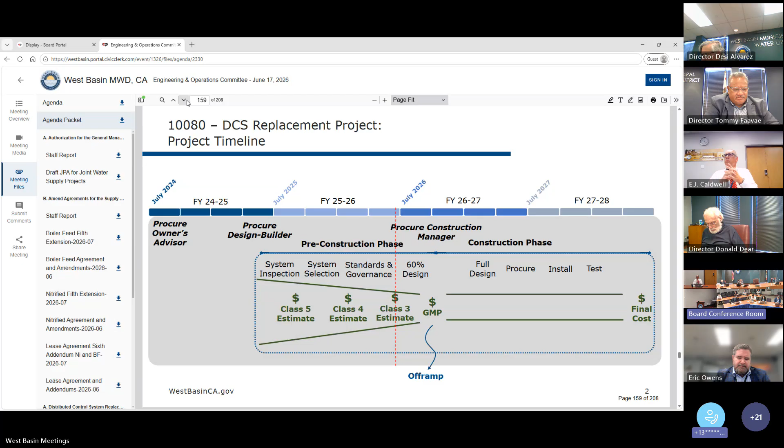We're now forecasting remaining fully within budget through to the GMP, and we don't anticipate spending any of the contingency. Next slide, please.

This slide shows how the construction cost estimates have changed as we proceeded through design. The black line shows the actual estimates, while the dotted lines show both the upper and lower ranges as defined in the standards developed by the Association for the Advancement of Cost Engineering, AACE. As you can see, the range narrows as the design is developed and decisions are made.

It begins at minus 50% plus 100% of the estimate at Class 5, and has now narrowed to minus 20 to plus 30% for the current Class 3 estimate. By the time we get to the GMP, the estimate range will be minus 15 to plus 20% either side of that black line, a range that will be incorporated into the GMP as contingency.

You can see here the black line, the primary estimate, has trended upwards slightly over the last year. The roughly $350,000 increase from Class 5 to Class 4 estimate was mostly due to the addition of 5 years of full system support that we baked into the cost estimate.

This additional support and subscription costs actually added approximately $1.5 million to the estimate, but the system we selected at that point was less expensive than we initially anticipated, and that reduced the estimate by around $1.2 million, leading to a net increase in the cost estimate of around $300,000.

Between the Class 4 and Class 3 estimate, we added some optional allowances to the cost. These are optional add-ons to the construction phase the district may wish to include later. For example, there's approximately $350,000 in there for preparing the Torrance site for a potential cutover to refinery ownership.

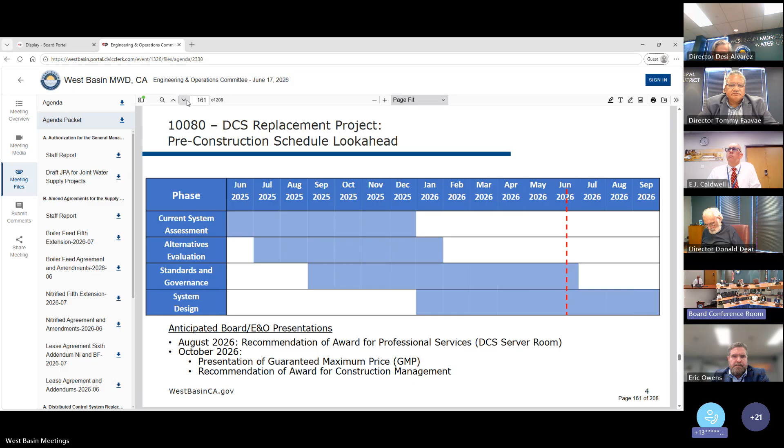Therefore, we'll be bringing this award back to the board in the next couple of months. The anticipated contract cost for this is going to be less than $150,000, and it is included in the FY27 budget. Next slide, please.

And so finally, on to the next steps. Next steps will be to procure that design consultant for the server room, to continue developing the design for this new DCS system, and then to finalize the dozens of new standards and governance documents that we're currently developing for the new system. The aim is to have all of this wrapped up in September for incorporation into the GMP, which we'll present in October.

And with that, I'll conclude my presentation. Open up to any questions.

Thank you. Director Faavae, any questions? No questions, but I have a comment. Thank you for your presentation. It's always good to see the next steps moving forward, and look forward to bringing back to the board on pre-construction and so forth. So thank you.

Director Jim? Nothing. Director Dear? No, thank you.

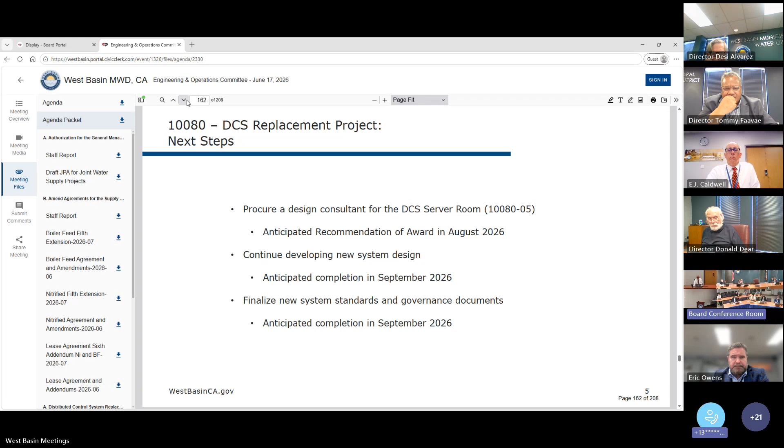On the presentation, can we go back to slide 3? Yeah, the cost estimate. Yeah, that is 160.

John, you mentioned that there's, as we're going through the process, you've added a couple of components to the project that were previously not there. Correct, yeah. And you briefly described them. But there's not much of a description in the staff report, so I was wondering if we could maybe provide us with a written description of what those are.

Just for clarity, would you like a description of the large items? We made a lot of decisions in the last year or so. Well, just the biggest impact, specifically of all the new items that you've added that were not part of the initial project. Okay, understood. And you referenced quite a few, so it'd be nice to have a better understanding of those.

And then on that graph that you have on that slide, that's a class 3 estimate at this point. Correct, yes. So that's plus or minus, I don't know, 30%. It's minus 15 plus 20, sorry, minus 20 plus 30 at this point.

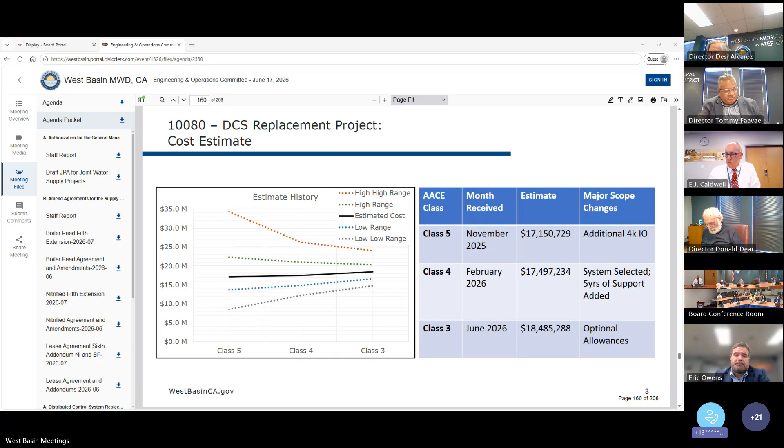Okay, any other questions or comments? Nope.

All right, so we will move on to the second item on our information calendar, which is the engineering operations update for water production and asset management. Yes, Mr. Chairman, this item will be presented by both Susanna Lee, our Manager of Engineering, as well as Mario Batista, our Engineering Supervisor. The item begins on packet page 164.

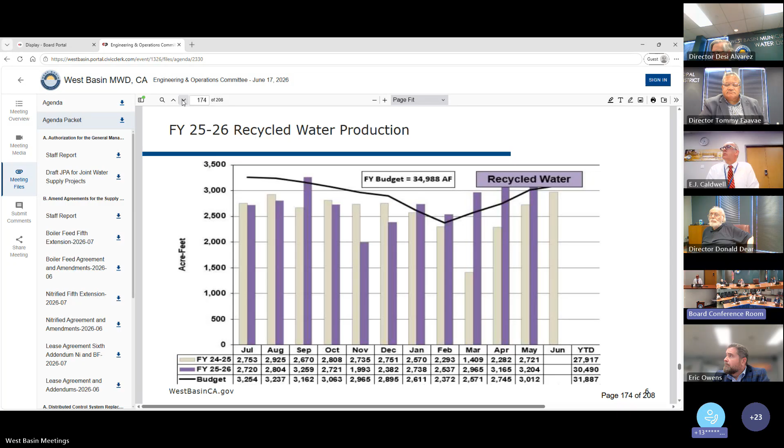Okay, production. This graph you might be familiar with from the finance committee. The main point is that we continue on this upward trend, meeting the monthly estimates and budget, and we're projecting to hit 95% of our FY 25-26 budget sales. Credit goes to our production teams for bringing back equipment that was out of operation the last few years, working with Jacob's team to improve reliability, and working closely with our Hyperion counterpart at the county to anticipate upcoming shutdowns and continue pushing for barrier production. It's been a great year.

Next slide is a different view of production. The green bar shows the FY 25-26 budget for each product line, the shaded bar is last year's production through May, year-to-date, and the deep purple is this current fiscal year. The main takeaway is that Title 22 is trending a bit down compared to budget, and barrier is the other major deviation from budget, but everything else is doing really well compared to budget.

I do have a question. In general, production this year versus budget is pretty much on target, with the exception of the barrier. Is that because of issues on our end, issues on the county's end, or a combination of both?

Combination of both, mostly on the county. In July, we were still waiting on certain parts, there was a leak, and we had to extend into August before we could bring production back up. That took out most of July. At the same time, the county had some unexpected leak on their end as well, which extended the shutdown of the production period in the early part of the fiscal year. Could you jump to the graph that's familiar?

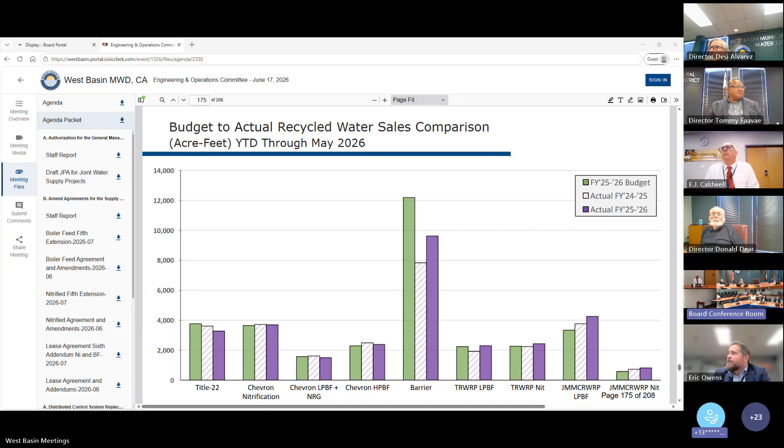We've been working closely with the county to maximize recycled water injection. Now we have a monthly three-way coordination meeting with WRD, the county, and West Basin, so we're working closely to hit our objective. They're aware of our annual target, as well as what the county is able to allow us to inject to the barrier.

I was just going to add that Susanna is probably being diplomatic, very nice, about our partners at the county.

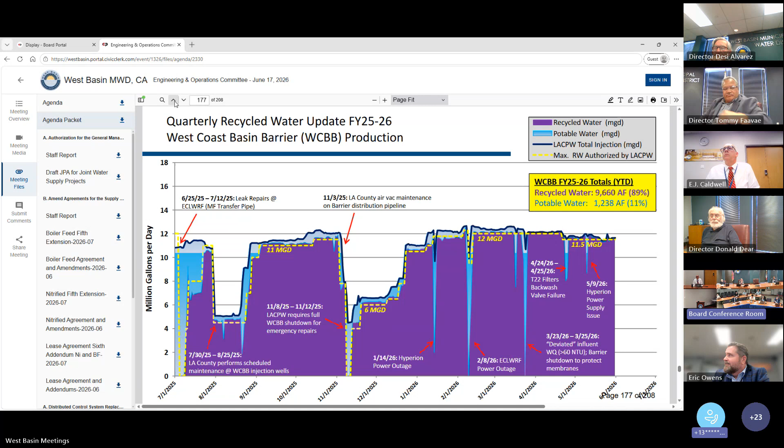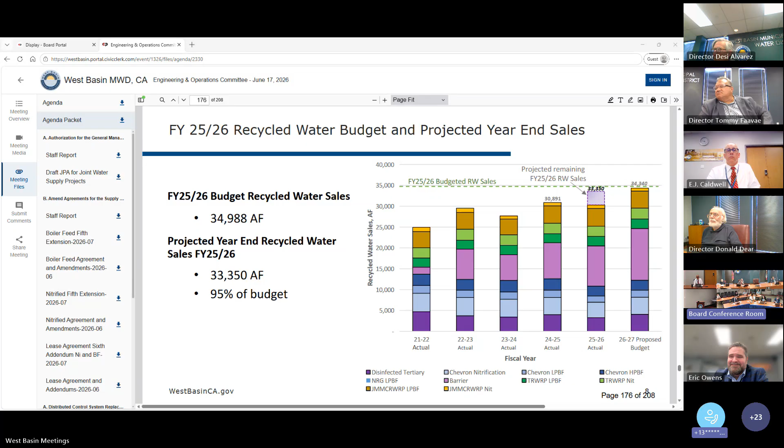Thank you. To enable all these productions, obviously we need membranes, so we want to bring some attention to membrane activities going on over the last few months. Just want to highlight that we continue to try to optimize our operations - this is one good story we want to bring to light.

We worked with a third-party recycler, coordinating with Jacobs on the previous two rounds of membrane replacement, including the most recent one. This third-party recycler provides crates that help the maintenance staff organize these used membranes and ship them back to the recycler free of charge, so we don't have to pay disposal costs. The maintenance staff really appreciate this effort because it helped them organize and made the replacement a lot more efficient - it used to take at least 3 days to replace a train, and it's now shortened down to 1 day, because it's just a lot more efficient this way, and it's free.

So these membranes are being reused - this is a good story to let the board know. And with that, we also want to let the board know of a couple upcoming activities, because like I said, to have these productions, we really need to have membranes.

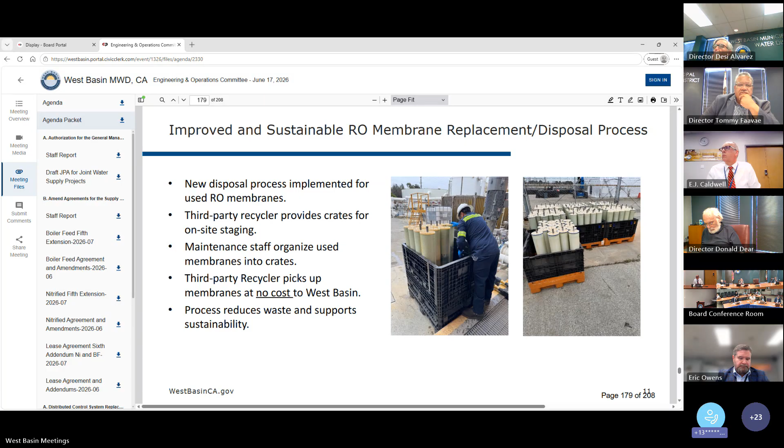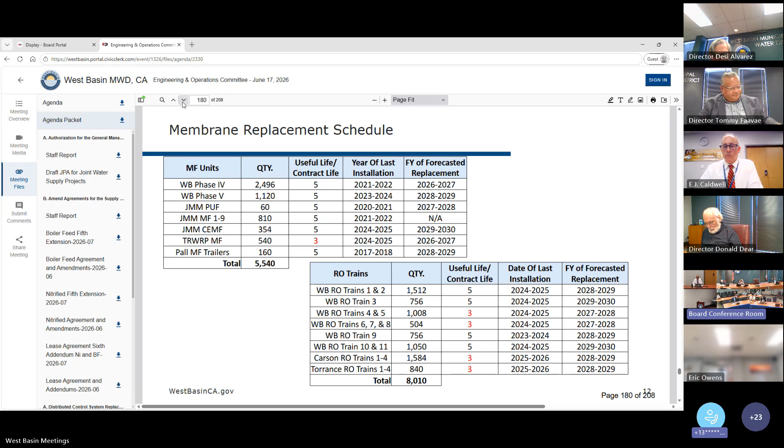That last column shows the fiscal year of forecasted replacements. The punchline is that within the next 3 fiscal years, the vast majority of these membranes are going to be slated for replacement, with just a few exceptions. Obviously those replacements will be based on actual performance—this is just how we're forecasting—but we want to be prepared for that eventuality, which is why we've already started a membrane pre-qualification process.

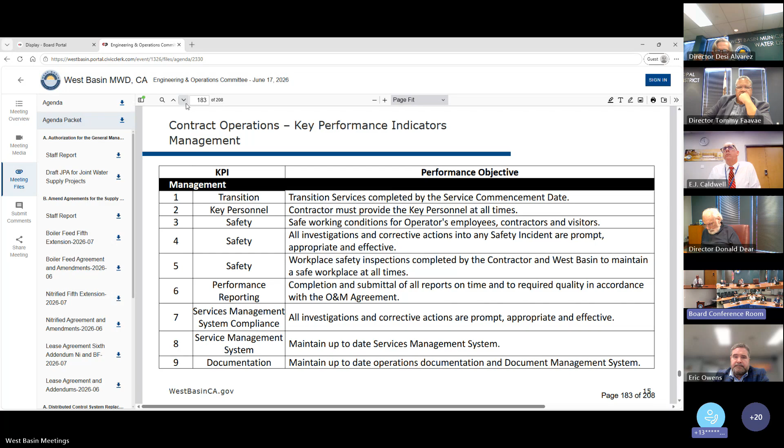This next section is, as Susanna alluded to, O&M contract KPIs. A critical part of our agreement with our contract operator, Jacobs, is these new key performance indicators. There's a total of 19 they're beholden to, and each has an associated incentive or penalty that we assess at the end of each contract year. Many of these are tracked on an ongoing basis, but as we approach the end of our first contract year, we're taking a very close look at the status of all of these.

What we've had Jacobs do as part of their requirement is report out to us, and develop a structure to report out to us, the status of each of these KPIs through a dashboard, which we'll show the early iterations.

I'm not going to go through all of our KPIs, but just a broad overview. This first 9 are management - that's personnel, safety, and then reporting requirements, both performance, compliance, and maintenance, as well as document management systems.

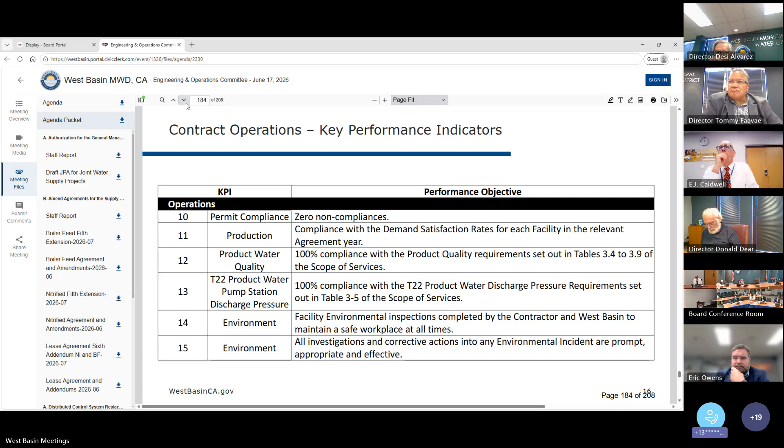The next slide. Can you go to the next slide, please?

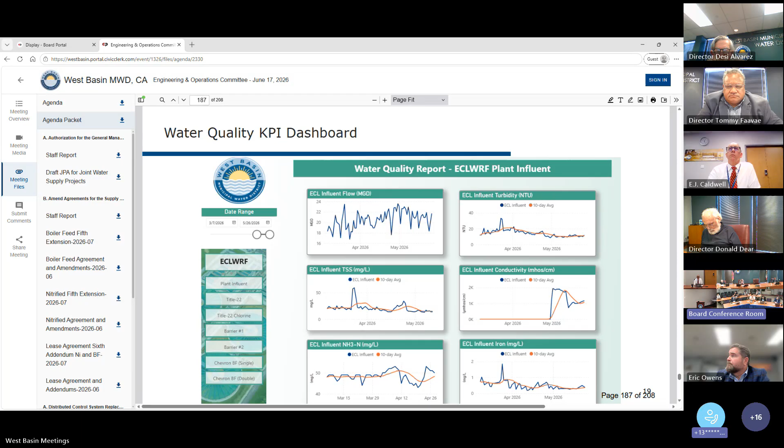With that, if you can go to the next section, asset management. I'm maybe a stand-in for Jeremiah on this one—he's our subject matter expert, definitely.

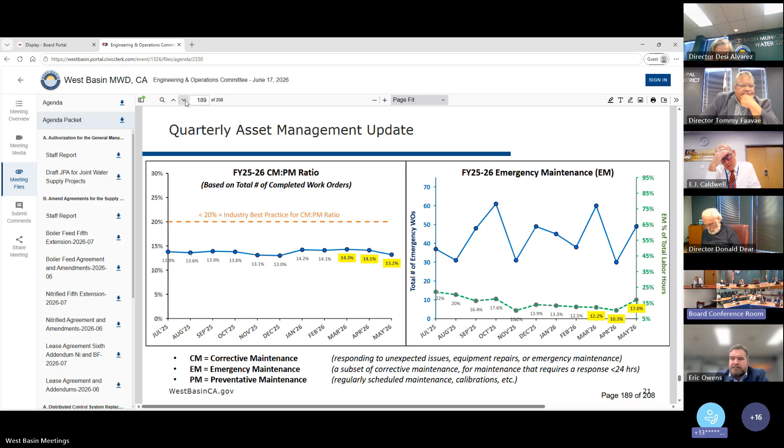That's a little more evident on the next slide. You can see here where we've made our major improvements, increasing the relative amount of time spent on preventative maintenance, getting into the proactive mode versus the more reactive mode with corrective maintenance. So it's a positive trend this month.

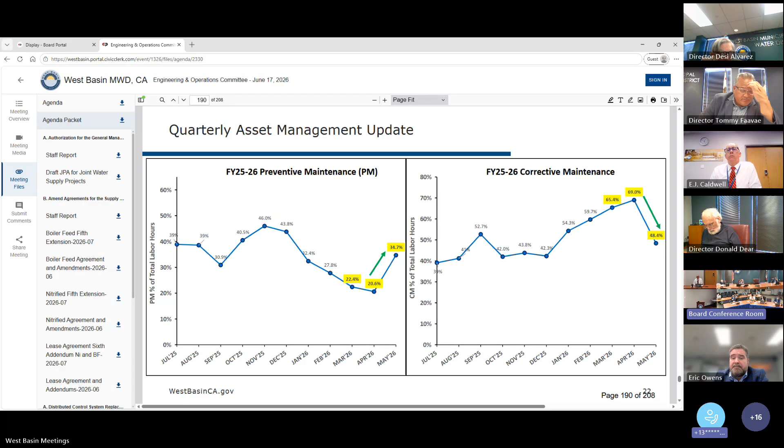And then finally, just wanted to show the live asset management KPI dashboard.

We're still working on this and how best to visualize it. Right now, this tool is more geared towards project manager use, so we're working on getting a summary sheet that's more applicable for the board and executives. But this is just a preview of what's been going on.

This has been something that Jeremiah spent a lot of time working on with the Jacobs team, so he deserves a lot of credit for it. I'll say this dashboard is further along than the others.

In parallel with that KPI work, the Jacobs Asset Management Team has also been working with West Basin staff on some condition assessment efforts.

This has been ongoing since the beginning of the Jacobs agreement, and we really finished the first round—an assessment of all the assets at all our facilities—literally just at the beginning of this month. This slide is an overview of that effort.

This consisted of an asset management team alongside West Basin staff physically going through every facility, photographing and documenting the condition of every single asset, recording that information, and going through a very detailed checklist bespoke to the type of asset. A very labor-intensive activity.

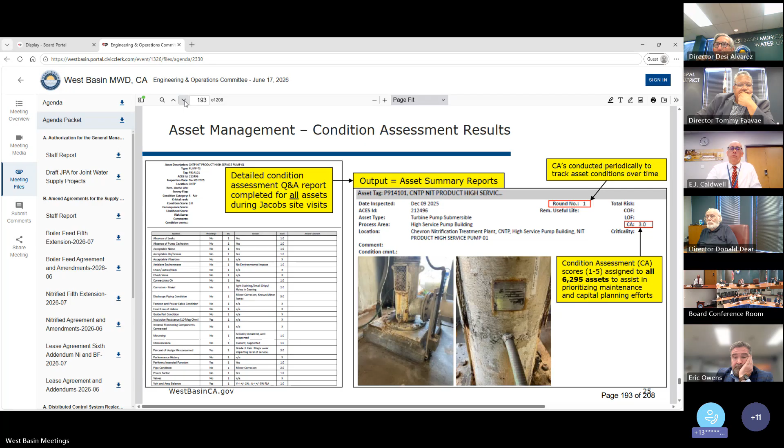So another activity happening in parallel is the predictive maintenance development. This is a program specific to several of our high service pumps. We're trying to get ahead of any maintenance requirements by doing additional investigation, including motor circuit analysis or vibration analysis, that can help us better understand what type of maintenance activities may be needed.

So this example is showing a Chevron nitrified high service pump 1. You're seeing on the right-hand side, a vibration analysis shows there's potentially some bearing wear being indicated. So something we need to be aware of and be prepared to do some maintenance on.

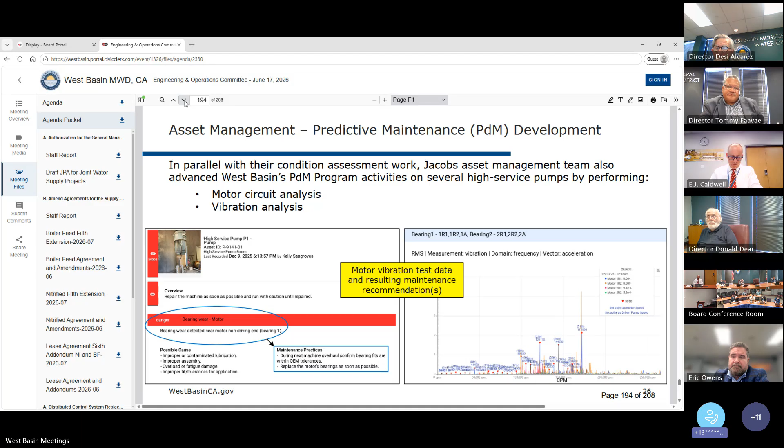Then let's go to the next slide. So another example of this predictive maintenance, now with the motor circuit analysis, in addition to having maintenance recommendations like the bearing wear you just saw, the reports can also show the potentially annual energy usage or loss associated with some of these defects or warnings. So it shows annual energy usage as a prediction, then makes some assumptions to develop a potential energy cost of what we're incurring by not performing this maintenance activity.

So then we can make a decision against what the cost of the proposed maintenance activity is, understand what that ROI is, and understand how long we can or should wait until we effect those required maintenance activities. Next slide.

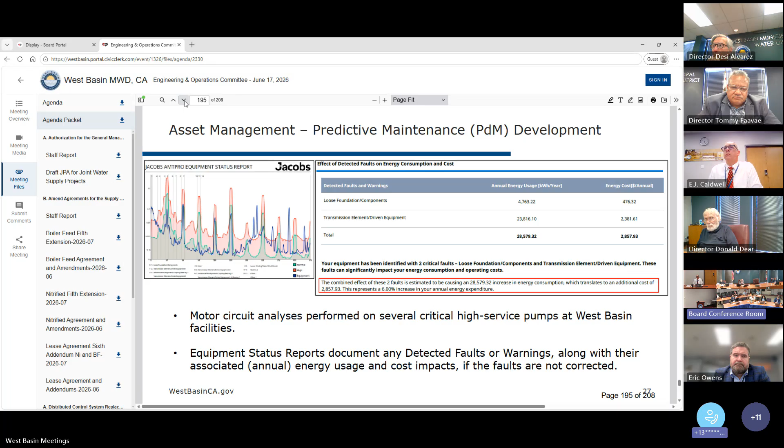And this is something we kind of already talked about, which is what are the next steps. We have the condition, and to get the overall criticality, the other components we're going to look at are both the consequence of failure, Susanna mentioned, and the likelihood of failure for each asset. Those scores combine to give us an overall criticality rating.

This is important not only for our asset management program, but within the contract we have a requirement for different types of monitoring based on whether an asset is determined to be criticality A or B categories that are tied to the contract. So this is going to be a collaborative effort because we have to come to a mutual agreement on which assets meet those definitions.

Those are really the next steps. That's what we're working on moving forward. That's the end of that section. The next is just going over maintenance activities. So I'll be happy to answer any questions you may have.

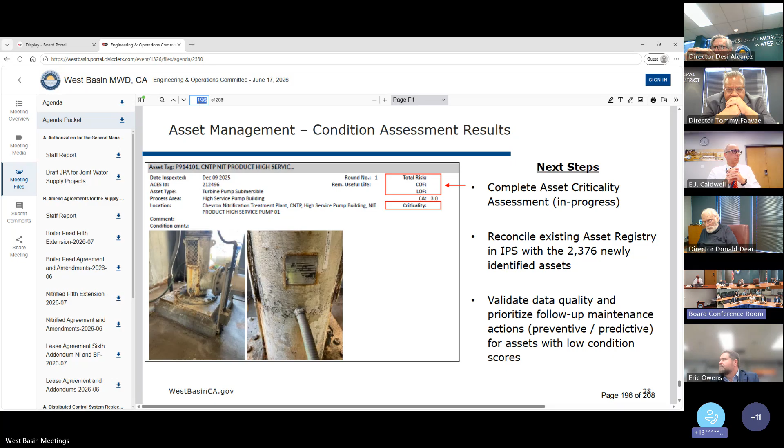So at the very beginning of your presentation, you had the dashboard up, and that asset management software, I think, was being populated. Is this the asset management software that we purchased that was going to be integrated into Jacobs? Or is this Jacobs' asset management software? So this, and where are they actually - the two?

So this is actually just Microsoft Power BI as the output. It is pulling the data from Infor IPS, which is the software we purchased, that we own. So it's directly an output of that. This is just a way to visualize it in the way that that software can. So this is our software.

That's correct. Now, when we purchased that software, if I recall, the question is, we purchased it in anticipation that they were going to use it and we've provided it. Correct. Yes. We identified in the contract that West Basin provides the CMMS software. Making sure they use it.

Yes. My question was, why are we buying this? Shouldn't they be providing that software? Just wanted clarification that this is what we purchased.

I can offer, Director, that in the various proposals received for the contract O&M services, everybody had their own flavors or preferences for different products. One of the things we were adamant about specifying is that we had already made a significant investment, even in our staff time, with this Infor system. So we left it open that if somebody did have a better way to manage these services, we would hear it. But for the most part, everybody was encouraged to speak to how well or how effective they would be in using Infor specifically. Thank you, that was my question.

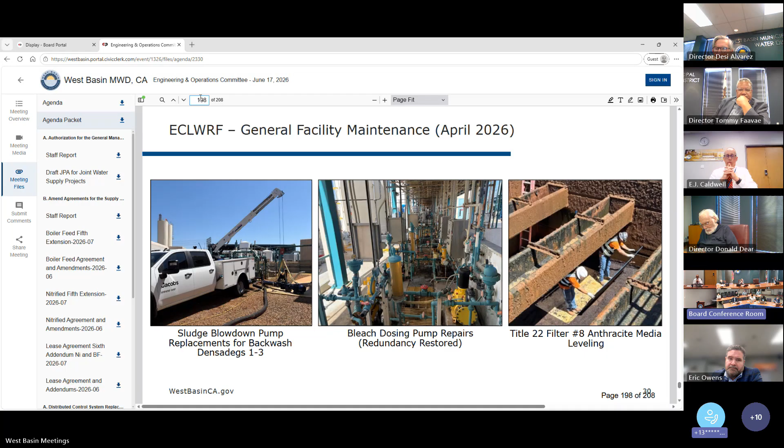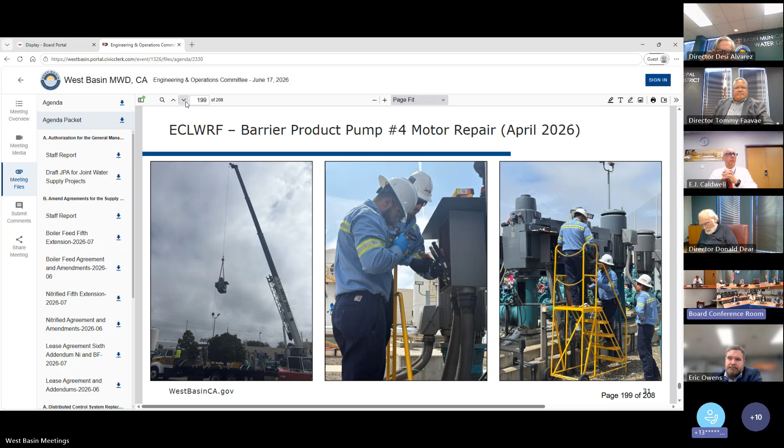This is one of a couple of major pump repair activities that took place this past month - the barrier product pump #4 motor repair. This was actually returned in April, and there was some effort that went into May with the I&C team to reconnect the pump and motor and get that equipment back into service to support barrier production.

The backwash pipeline video inspection - we have a backwash line for our converted filters that's had some leaks, so they sent a rover with a camera on it down the 20-inch pipeline to try to identify some of the areas that are likely for leaks. We were able to narrow it down, and we actually just recently this week charged that line in the section that was identified, and there's a number of leaks. So we'll show photos in the future of what that actual repair looks like, which could potentially turn into a bigger project.

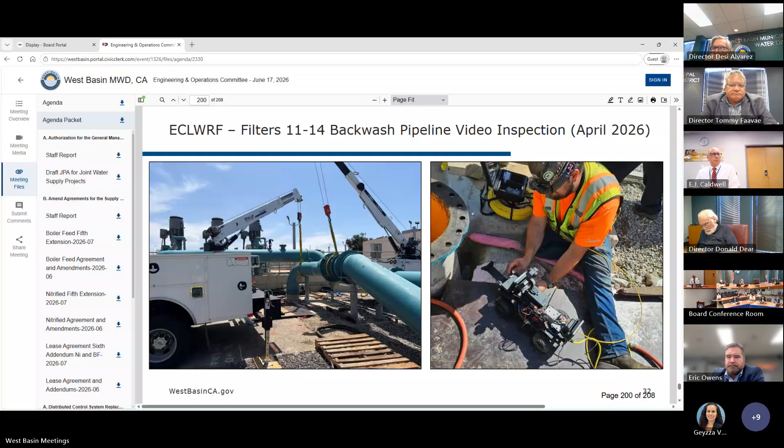On something like this, did we have to pay extra? This is above and beyond the basic contract.

How much did that little structure cost us? I would have to verify. I don't know off the top of my head. We have not gotten the bill.

This particular analyzer was contemplated in the fixed charge we negotiated with Marathon, so technically Marathon had to pay. Marathon's going to pay for the 4 pieces of 4x8 plywood, the roof, and a mini split as part of the fixed payment. Having this in real time was important enough to them that it was a point we discussed and negotiated in the contract.

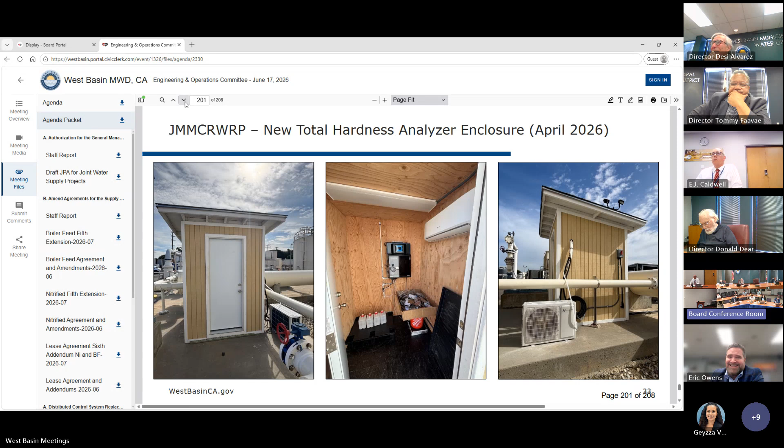Okay, it's a nice shed though. Next slide, please.

This is smart pump station technology, the Hyperion secondary effluent pump stations, specifically the dynamic pump optimizer, or DPO. We're getting much more detailed real-time data on the performance of each pump individually, data that's substantially more detailed than what's available from our SCADA system right now.

We're currently in a calibration phase, monitoring what our current operations look like. Once it establishes that baseline, it should have enough data to make operational recommendations so we're maximizing our energy efficiency.

Earlier this week we had a chance to see what that dashboard looks like while it's still in the calibration phase. It's fairly evident there are opportunities to improve energy efficiency and change operations to extend pump life and hopefully mitigate maintenance requirements. There's room for improvement, that's what we're seeing.

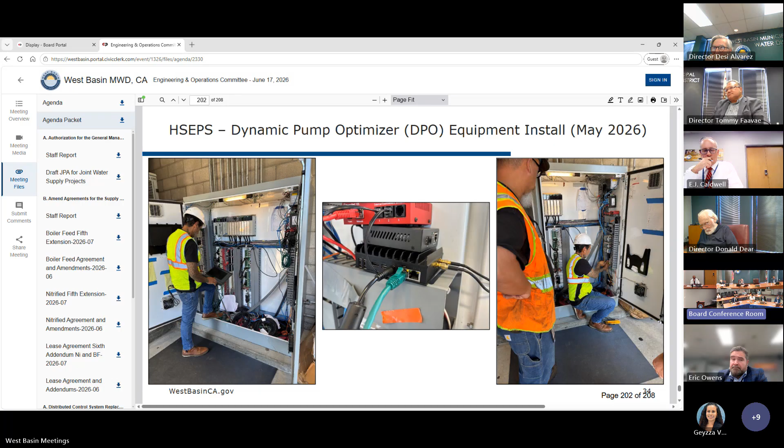Next slide please. Another major pump repair is one of our Title 22 product pumps. This was reinstalled May 12th, so we had it back into service for Title 22 production use.

This is critical, I want to highlight this is one of our major production pumps and it's been out of service a couple of years. To bring back reliability, I want to give credit to Jason and Jeremiah for staying on top of Powell's brother to make sure this pump was back in service in a timely manner.

We did run into an issue a couple months ago when we had high water demand and didn't have enough pumping capacity. It ran into pressure issues as well when we had to turn another constant speed pump on and off, which subsequently created issues in the distribution system.

Broadly, a lot of these pump repairs are a substantial part of this overall effort, and we're seeing improvement in our overall production. When we have substantial redundancy, we can take advantage of opportunities and mitigate the degree to which we lose production when things go wrong.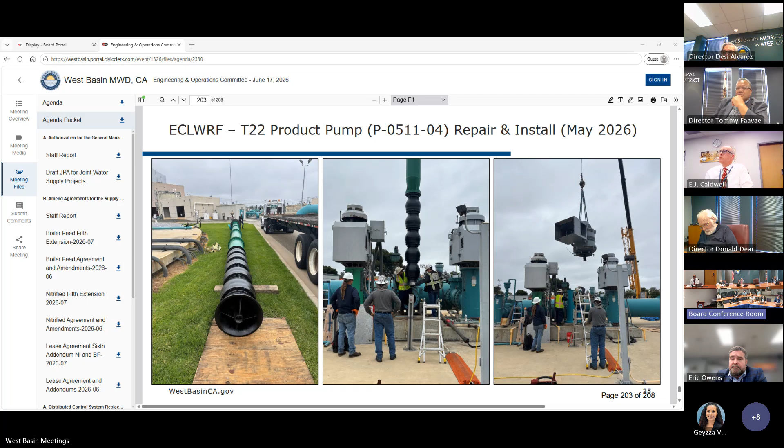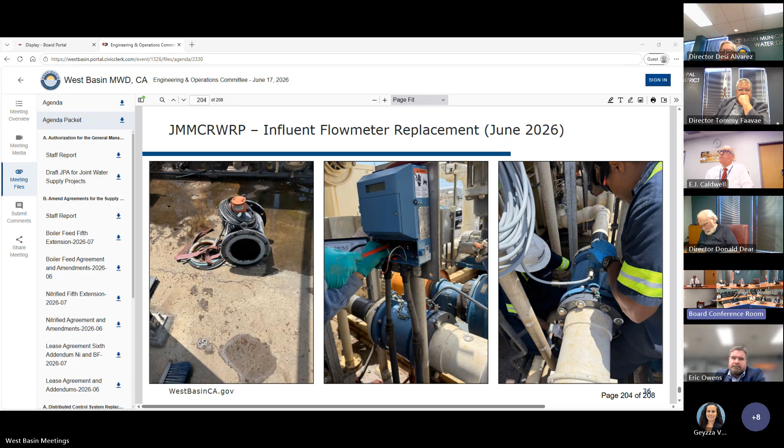Finally, we have the Carson facility influent flow meter replacement. This is an old flow meter that's been in service for over 10 years, and the outputs meant it merited a replacement, which was done at the beginning of this month, June. That concludes our presentation. We'd be happy to answer any questions you may have.

If I could circle back real quick, Director, to connect the end to the beginning of this presentation. It was long, but to reiterate what Mario pointed to, the level of attention to asset management and maintenance activities has absolutely impacted those graphs showing productivity nearly meeting our budget this year. Specifically in the last 6 months, those numbers being where they are is purely due to this level of attention our staff and Jacobs staff have worked on.